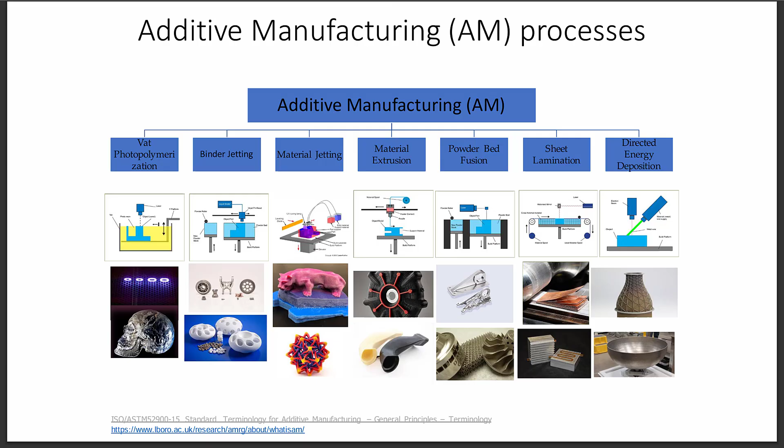So what it does is pull something out from a liquid reservoir. I don't want to spend too much time explaining it in English—the video can explain everything. The Form 1 Plus is a stereolithography 3D printer.

It's called vat photopolymerization—vat is basically a liquid reservoir. Let's start by taking a closer look at the printer. When we open up the light-blocking cover, we can see a build platform inside.

This metal plate is where the parts are made. Underneath the build platform is a resin tank. This clear window gives the ultraviolet laser a path to cure the resin. To start a print, we upload a file and fill the resin tank to the indicator line.

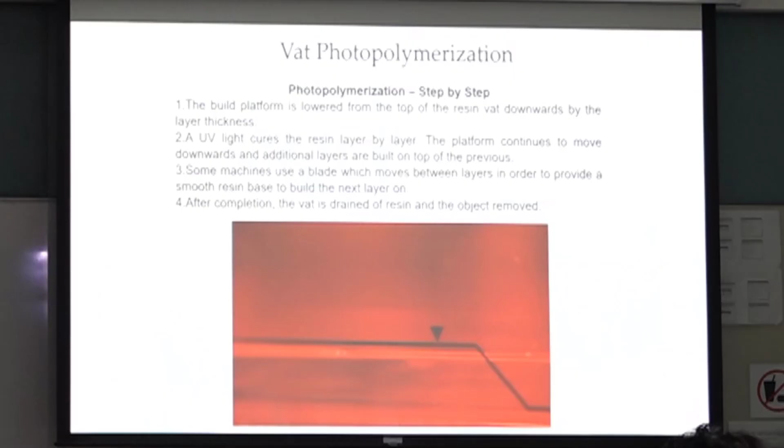You can see the laser passing back and forth inside, hardening the resin. Nowadays, this method is used less and less.

Instead of a laser passing back and forth, some printers use a projector. After printing, you wash off the excess resin to clean the piece, then snip off the supports and finish removing the part. Stereolithography is known for producing extreme detail, with layers down to 4 times finer than a human hair.

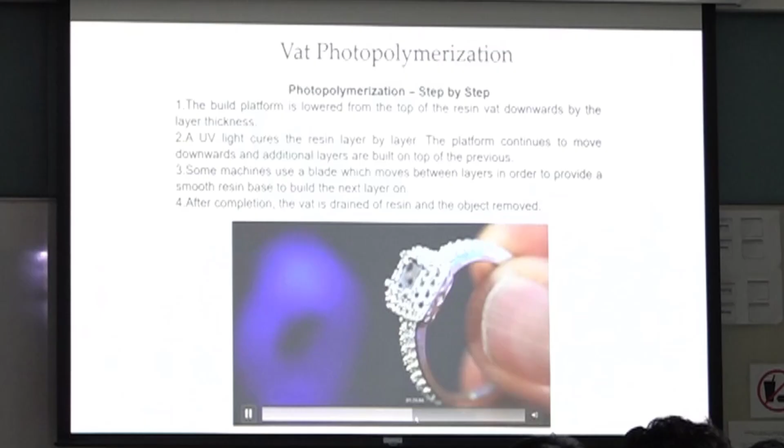The Form 1 Plus lets us take advantage of a library of materials, so we made some other parts to show what these resins can do. A castable resin gives jewelers and engineers an inexpensive way to produce metal parts. This flexible resin is great for simulating different textures, especially good for printing very soft material.

Now let's compare how the Form 1 Plus parts stand up against the filament printer. Yeah, so you can see this compared to your home use one. Feel the ridges. You can see that filament parts quickly snap along the layer lines.

Yeah. The SLA process creates a chemical bond, so our prints are quite strong and can sustain for a very long time, because this one is thermoset. Thermoset, not thermoplastic. So this can sustain temperature for a longer time.

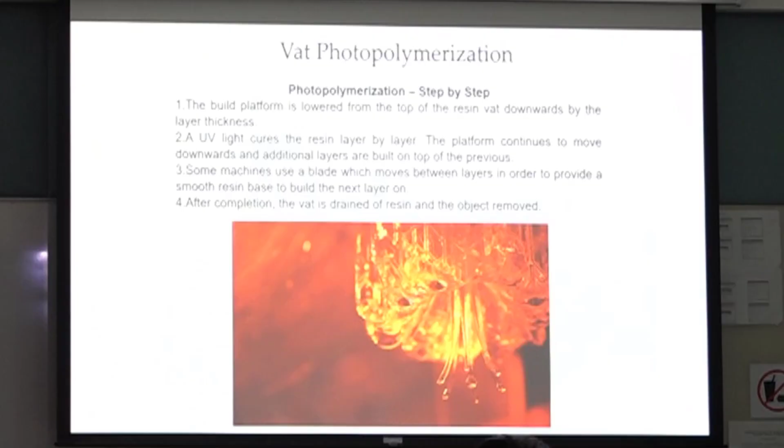So this one you have already seen. This is mostly thermoset. You have seen it in many of the applications like protective devices, like shoes. You have seen it, right? So the next one actually you haven't seen a lot, because this one is for industry use, so-called

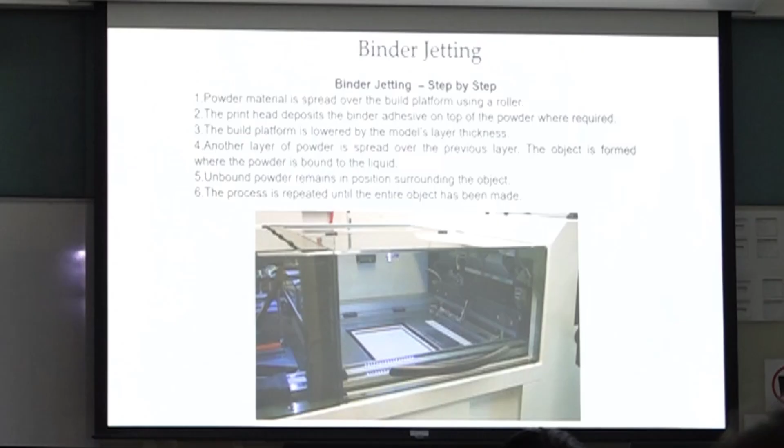binder jetting. Binder jetting additive manufacturing is a process inspired by the technology of inkjet printers. In this process, a liquid binder is selectively deposited on a powder bed with a printhead. It is a growing process that allows the production of parts for the manufacturing, medical, and dental industries. This technique enables the production of metallic and ceramic parts as well as sand molds for castings.

To start the process, a 3D drawing is imported into the printer software. The powder to be used is placed in a dispenser, which ensures a constant supply during printing. First, a powder layer of a specific thickness is spread. Thereafter, the printing head, moving on 2 axes, projects the binder where necessary.

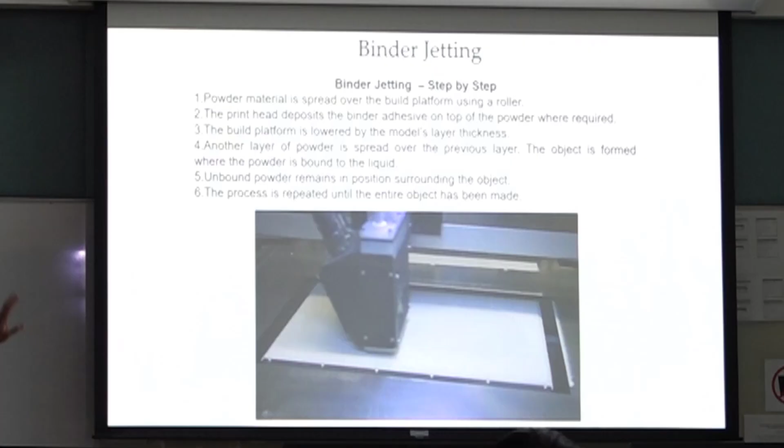Before moving on to the next layer, the solvent contained in the binder is evaporated by an incandescent lamp. The powder bed is then lowered and a new powder layer is deposited. Therefore, the production takes place in a series of steps that build the part layer by layer. When the cycle is completed, the binder is cured by placing the container in a furnace. The temperature and time depend on the type of binder employed during printing.

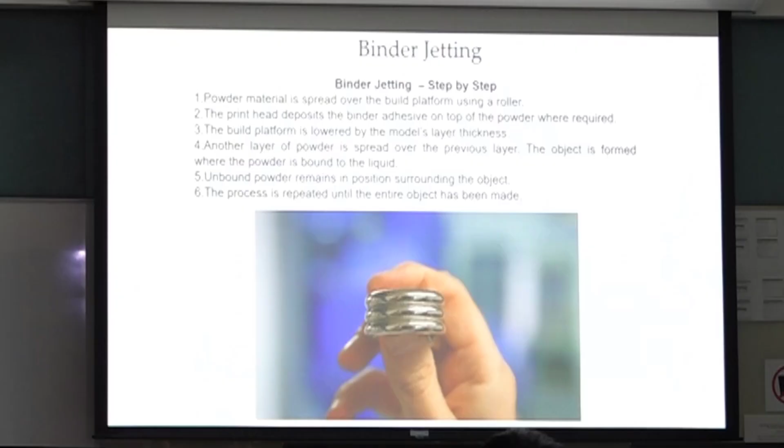After this step, unbound particles are removed to reveal the part or the mold. The sand molds are then ready to be used in foundries. The metal and ceramic parts must undergo sintering, infiltration, heat treatment, or hot isostatic pressing before being used.

Okay, this one, binder jetting, is actually good for mass production. One very popular application now is the iWatch. The casing, the outside shell, is actually binder jetted. This can be mass produced and the price is relatively low. Apart from the metal things you have seen, like titanium, it is actually very good at making ceramics, like some of the teeth structures.

And the third one, number 3, is called material jetting. Material jetting is exactly like the home printer. Inkjet machine, right? It's just in 3D. Maybe the best developed one is HP. They can print 2D, they can print 3D. And this one, you see the picture, it's very good in multicolor, a very vivid demonstration. And it can print very clear polymer.

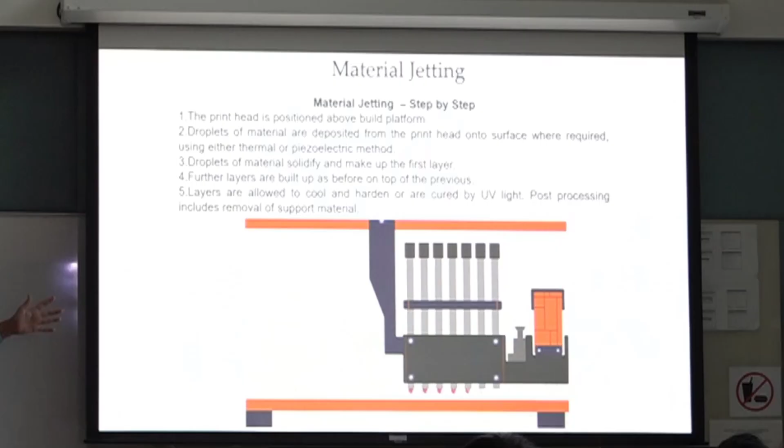PolyJet. Beautiful, precise models. A huge variety of materials and colors. Yeah, it's the same as the HP inkjet printer, same principle. But instead of ink, plastic. A UV light instantly cures the plastic, solidifying it. And so, layer by layer, complex models take shape.

The most advanced PolyJet systems can build multi-material parts. Soft, rigid, clear, and colorful. You can even adjust material properties like heat resistance and durability. The same technology that makes gorgeous prototypes also makes precise manufacturing tools.

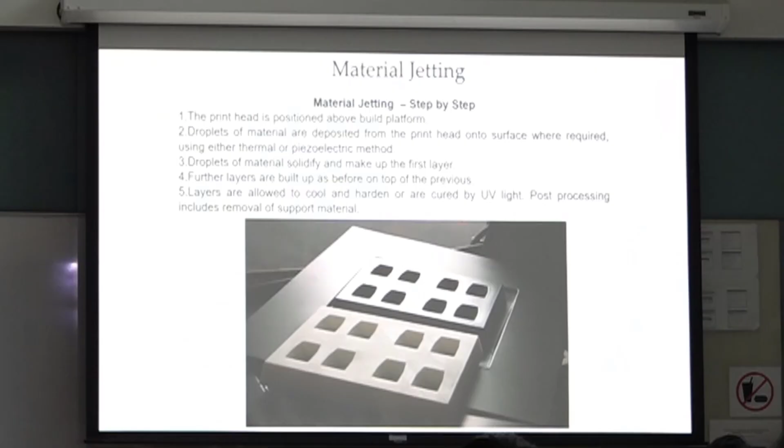Designers can predict future needs and serve them now. Manufacturers deliver better products faster and with less waste. Researchers have new methods of saving lives. PolyJet is reshaping industries like film, fashion, and medicine. It's helping people with great ideas improve the future. What's next?

Okay, right. So this one is a bit like an inkjet printer, because it can have many nozzles at a relatively low cost. Actually, it can mix very well, because it comes out as a liquid jet, small droplets. So it really can mix and make multicolor ones.

If you see in my lab, the QR code actually is printed this way, right? Some of you have already seen it. So it's very good, but they only do polymer, and they only do colorful things, right? I mean, good for demonstration.

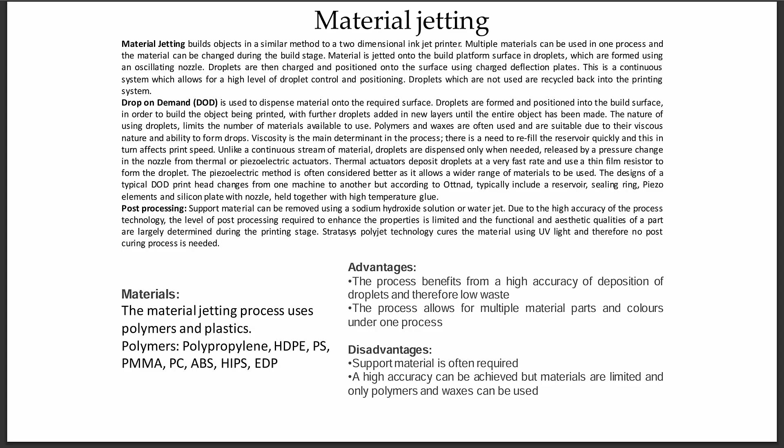This is number 3. Number 4 is the most common one, and most people think this is 3D printing, but actually it's 1 out of 7, okay? It is the one that we see every day, in every home. It's a game changer. It can create parts and geometries that you can't do in an injection mold. That's going to create a revolution in the near future, and this technology will be adopted as a major process for manufacturing components.

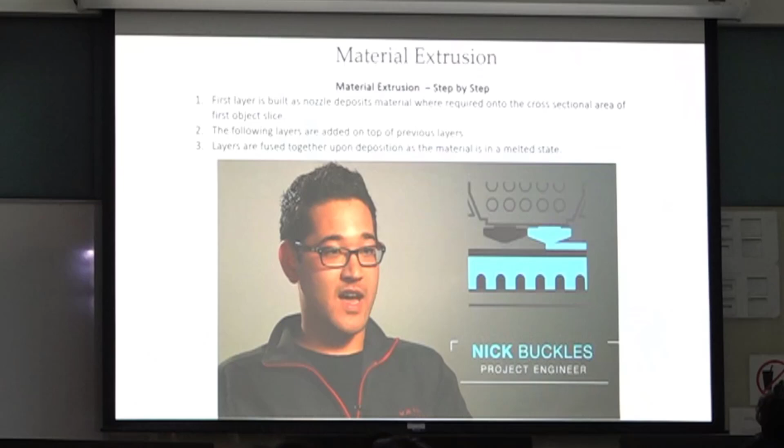FDM, yeah. This is what we think that was the 3D printing. It's a fancy word for laying down a small bead of plastic. What's really cool is you can have a real engineering grade thermoplastic, so the same stuff you'd injection mold. Someone needs an ABS or a polycarbonate or a high temperature Ultem.

Yeah, this is for industry use, ABS. What we are printing daily is the cheap PLA or PETG, close to the same quality and mechanical properties. You can see, normally the surface will not be nice. You need an additional polishing step, at least for a good looking part. If you want the industry use, that's more challenging.

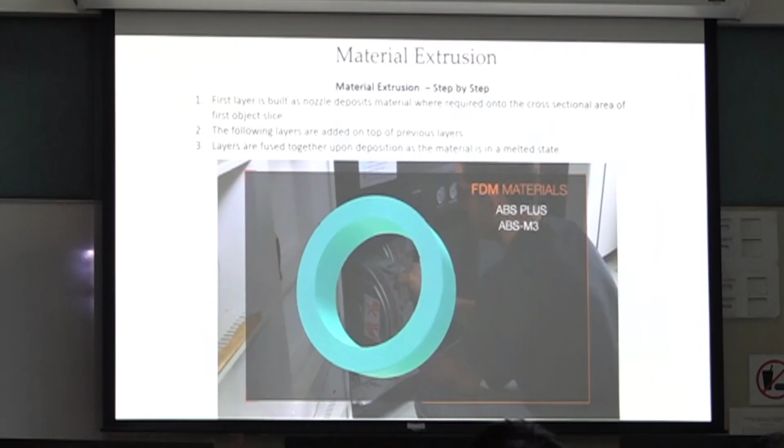The raw material is produced into filament, like a fishing line type form. That filament is wrapped around a spool. Yeah, this is the one that you see mostly used to build parts. I mean, it used to look like this.

About 10, 15 years ago, it was first refined and systematized by this US company. The material is extruded and then layer by layer the part is built. But now, of course, most of the companies, 9 out of 10, are from China.

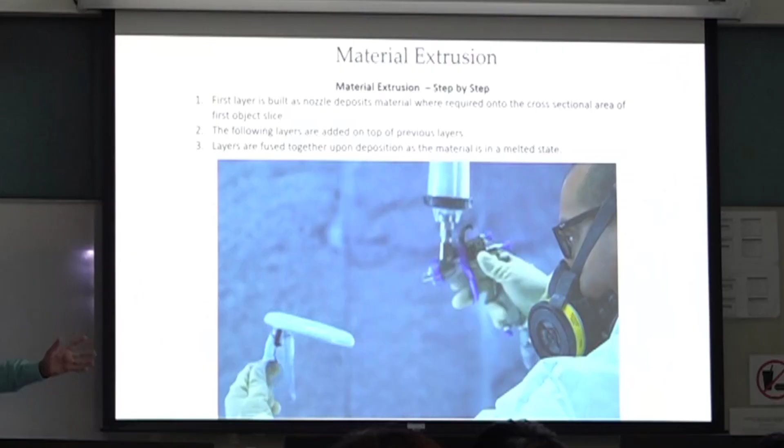Support material is removed. We also offer post-finishing operations that can smooth out those layers. Yeah, most of the printing will not look good. You still need extensive post-processing to provide smooth looking parts. We developed the technology to fit a full breadth of geometry sets.

But this one, I believe everybody knows it. Everybody has seen this machine. Everybody uses it. And the new generation is a bit like this. So they deposit the material bit by bit. Okay. So this one, as you can see, can only use thermoplastic, right? And some of our engineering use, but for our daily use, the cheapest one that we buy, I mean, for the souvenir I give you, is PLA or PETG, right? So that's the cheapest one.

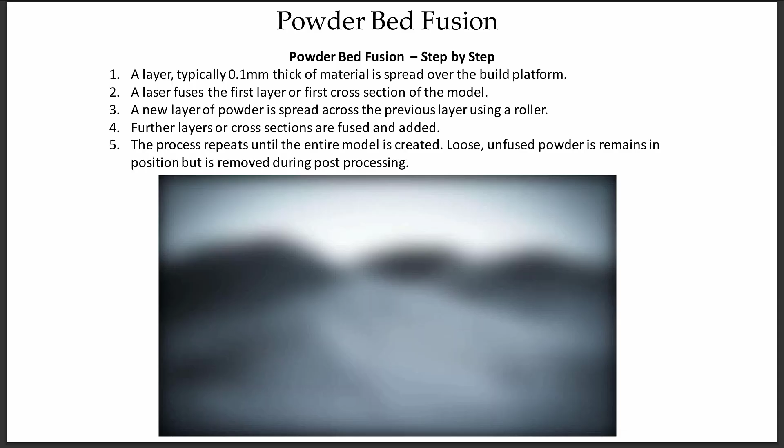But for most of the real high-end use, if the one I give you is $1, the thing that I can sell is $1,000 or $10,000 a piece, or even $1 million a piece. I mean, $1 million Hong Kong dollars a piece is actually this number 5, right? Powder bed fusion, mostly making metals, and obviously not used for our commercial use. It's for defense, for aerospace, and for rockets, right?

Like Elon Musk or this Dragon, those kind of rockets. Now, pretty much all the rocket components are 3D printed, not the old school, right? All 3D printed, and the process is like this. So you have seen it in my lab in the morning. So it's from metal powder. We'll fast forward, okay? Yeah, it's a bit like this.

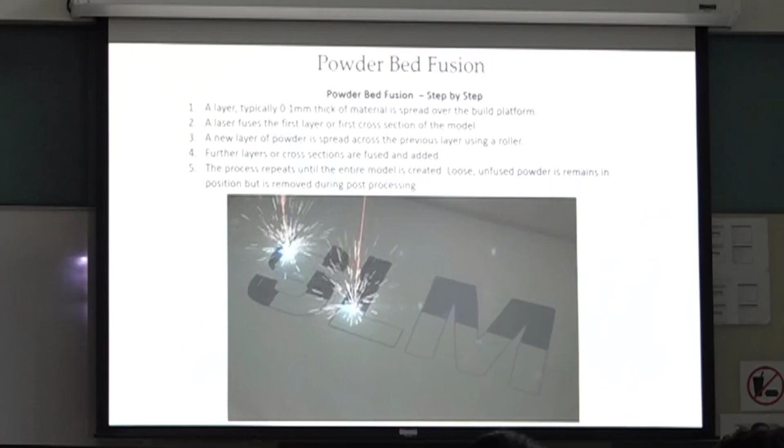You use a laser or energy beam to scan one layer, and then give an additional layer of powder, a new layer of powder you can see, and then you print again. You may write the same thing or you may write differently, but layer by layer. Because of the powder bed support, they can create very complex geometry. So if you want something very strong, very complex geometry, this is the one. And that's why most of the industry actually prefers this one.

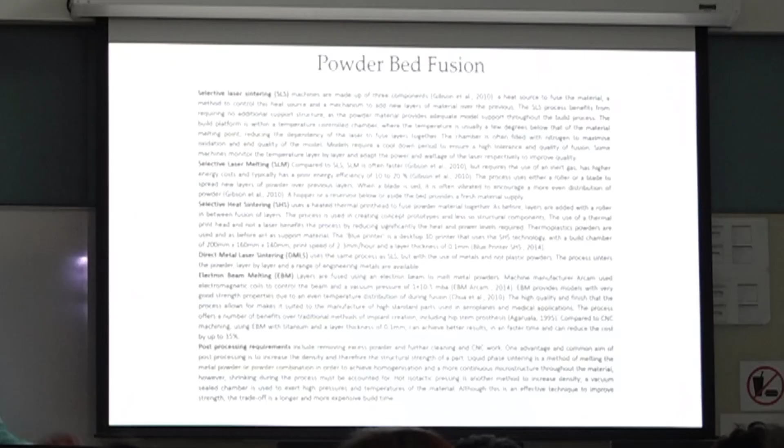They have many variations, but as you can see in my lab, most of the industry uses this. I would say 80% of metal parts are made in this technique, not the FDM that you've seen daily. There may be some other variations, like this one, E-beam, right? This is to print the aero engine, the fan blade, and also the nozzle. So there have been many uses already in aerospace, and it allows for the creation of optimized parts that are not constrained by the limits of traditional manufacturing.

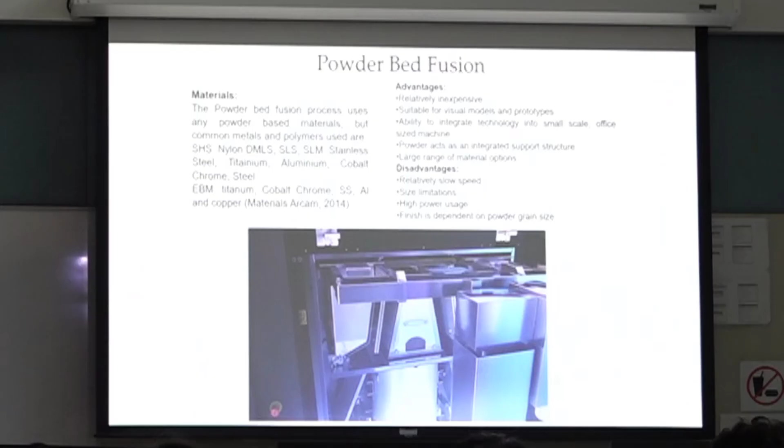Arcam EBM has the unique ability to tightly stack parts within the build in order to increase productivity. Instead of a laser as heat source, this one uses the electron beam. Following this, metal powder is loaded into the machine. The build chamber is then closed and a vacuum is created to ensure a clean, controlled environment that allows for the processing of reactive material.

Next, Arcam EBM's powder layering system evenly distributes a thin layer of powder on the build. Same principle, powder bed. The electron beam heats the powder bed to the optimum ambient temperature and then proceeds. Electron beam first heats the substrate, first contour melting, and then higher the energy and the melt.

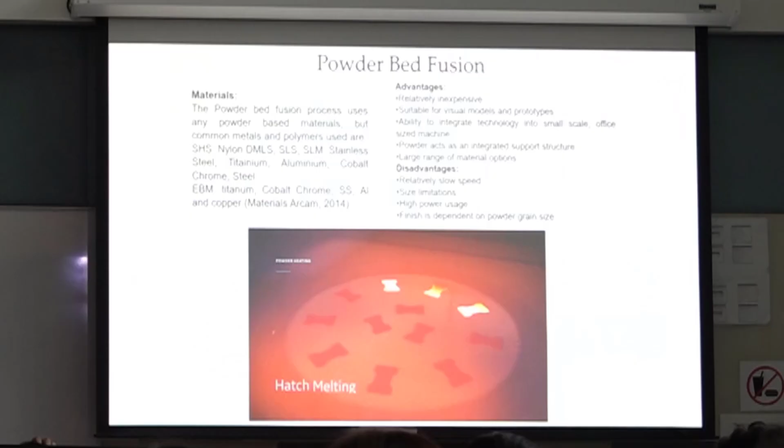Generating the beam contains no moving parts, allowing for extremely fast and accurate beam control. So you can see the electron beam, it's just all using magnetic force, electromagnetic field, to control the electrons and to move to the area that you want. As each layer is completed, the build is lowered and a fresh layer of powder is ready. Yeah, there is a new layer of powder. And one by one, then the build is complete, the whole thing is extracted, and the Arcam EBM machine is prepared for the next build.

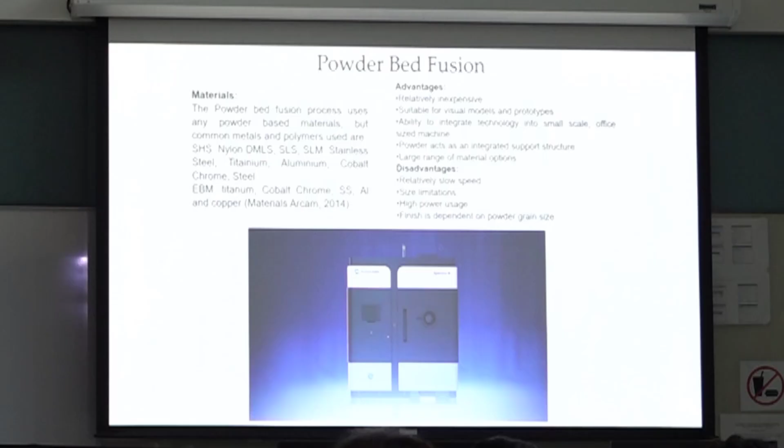Okay, so this one is also the same powder bed fusion, number 5, but using a different energy source. Most people use laser, right? Some tend to use electron. This is for high-end use, for very sensitive materials like intermetallics, titanium aluminide, TiAl. So this is not for iPhone, of course. This is really only for aerospace and defense use.

And in the world, there's only 2 suppliers. Obviously, one from China and one from the US, GE. And this one, I think most people haven't seen it. I only saw it once in my life, and this is a very funny one. Layers of newspaper, or paper, actually. This is really for fun only, and not in much use.

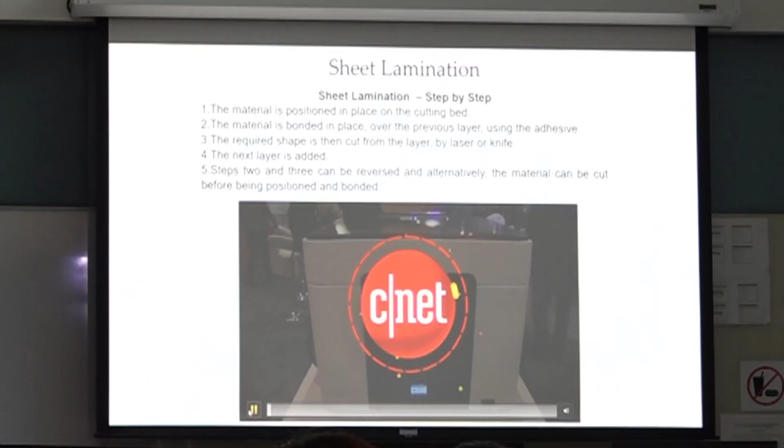Sheet lamination. It feels like a hammer, but how would you like if I told you this is actually made from paper and printed with a 3D printer? This is the Mcor ARKe, the world's first desktop full-color 3D printer, and it can print a variety of different objects that look almost like everyday life. They are very hefty, very sturdy, even though they are made out of paper. So there are actually a couple of different components to this 3D printer.

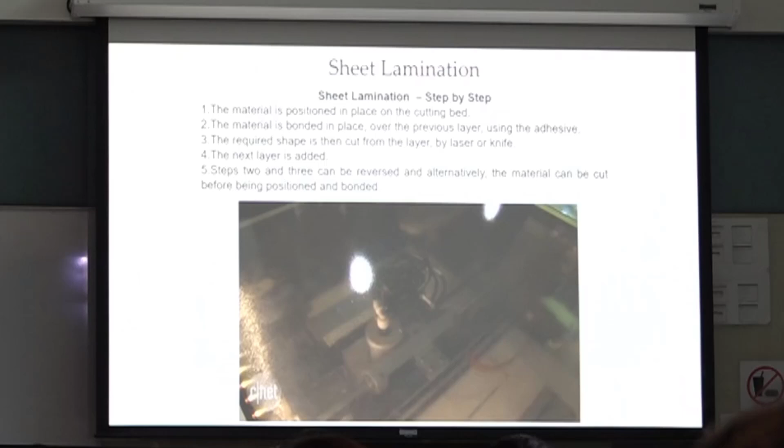But of course, inside is a 2D inkjet printer. But I haven't seen it in life, actually. It prints all the color onto the paper surface. It is then cut out in the particular shape that needs to be formed. An adhesive layer is applied, and then a heat plate comes down to press the layer of paper into the one below in order to start forming the shape.

The company claims it's 4 times faster than an industrial printer that they have, and you can recycle the waste, plus the printer is using water-based adhesives and inks. This also means that there are no toxic fumes or powders released. The ARKe prints at half an inch per hour, which is comparable to other printers like the MakerBot, but it's not the fastest 3D printer on the market.

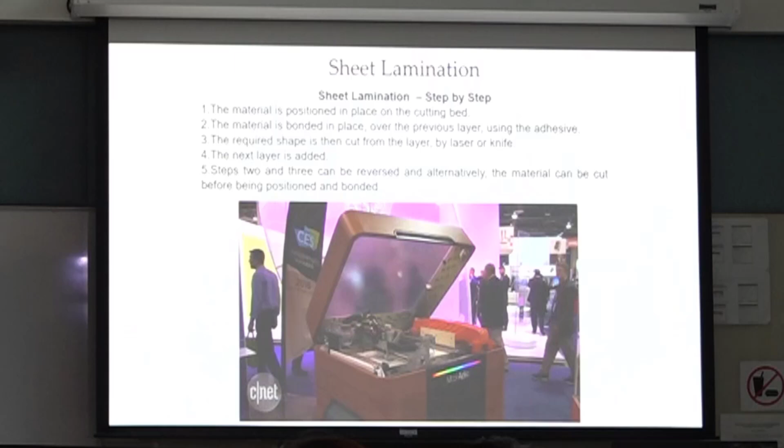You can get a couple of customizable skins for the printer, including wood, carbon fiber finish, and a brushed steel finish as well. The Mcor ARKe will be available for £5,995 or $8,995 US, available in Q2 of this year.

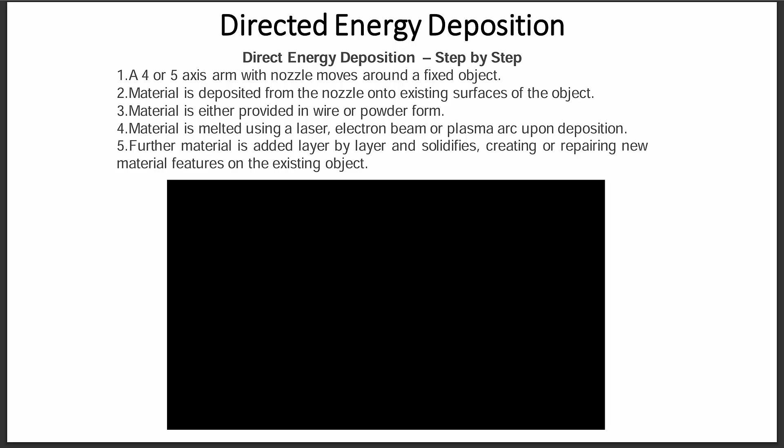Yeah, so you can see, if you sneak peek behind the background, that was almost 10 years ago and not much application really. Okay, but still it is classified as number 6, because its process is quite different from others. So the last one, quite often used, so-called DED, is number 7. Number 7 is actually quite often used in repair, in oil and gas, railway service, trains. You also saw it in my lab.

So it is very dramatic. It looks very busy, but actually cannot create a very complex shape. It looks like a very complex shape, but actually not. This is mostly used in repair or making something very large.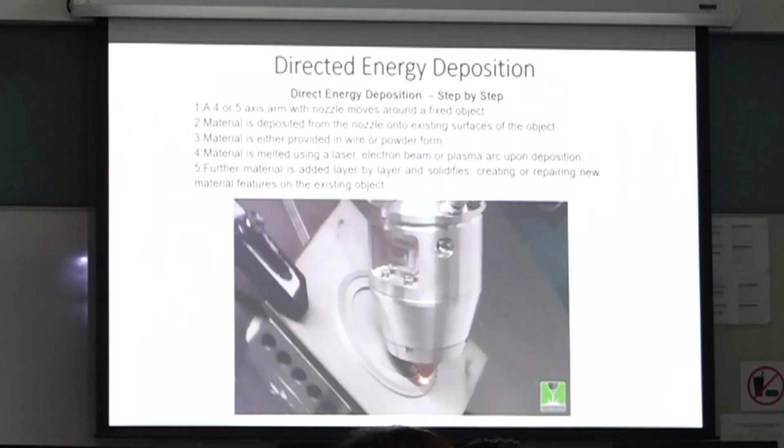Yeah, when they move, this is something like 5-axis. It looks something like this, right? But most likely it cannot have that. You always come down. That's why. And the most easy one is from below.

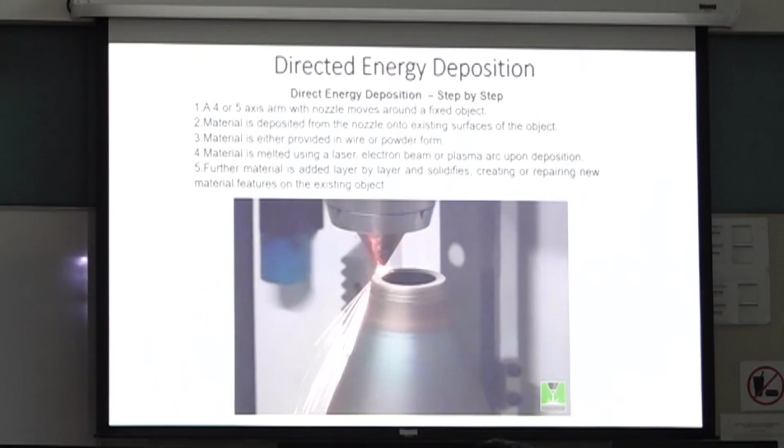They can put different materials. Okay, right, this is an example of what it makes. If you see, actually, this is them making the rocket nozzle, the nozzle where you spray the fuel. That's for the nozzle bit. And this technique is very good for making very large things and for making repairs.

So one of the examples you will see is the sculpture outside the government headquarters over there, right? That is made by this technique. All right. So with this, I would like to say that in 3D printing there are totally 7 techniques. It's not only number 4, FDM, that you have seen.

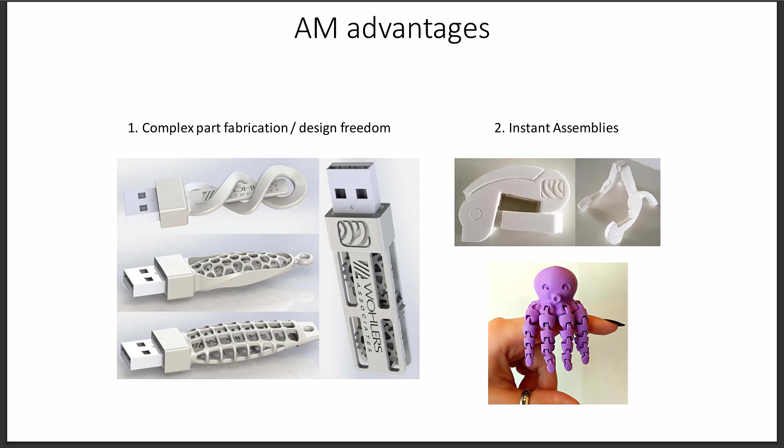So in industry use, obviously, it's not designed for toys, right? We are using it for real life use, and real life use has many advantages. Why do I need 3D printing? Why not use other things? A few advantages. This has already been summarized; it's already the golden rule. There's no argument. We know there are 6 in total, right?

So number 1 is design freedom. You can do some very artistic things. If you happen to have your so-called Shap-E, right, or Sora, I mean, Sora is video, but Shap-E, you want a 3D object that looks beautiful, you can do that. Or instant assembly is number 2, which I gave you this morning: one print, many parts together. No need to assemble them. They can move automatically, right?

One example is my little octopus, right? The other one is the shark. Actually, that shark was generated by AI, but just for your example. It looks good, it can move, and this model sold more than 1 million, just selling the design only, not the actual printed parts, right? But that's for design only, for art design.

For industry, things are different. Most people will tend to use so-called part consolidation. That means before it was 20 parts, now only one part. And this is one. If you fly, inside the aircraft engine they spray fuel, right? This is the nozzle.

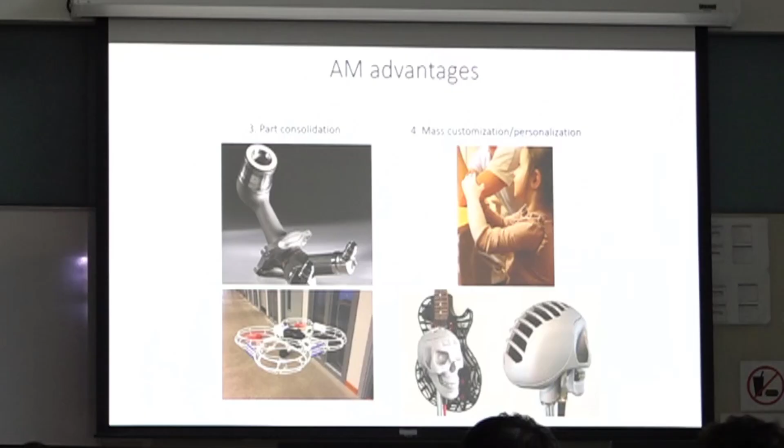The other one in our daily life is the drone. It used to be slowly assembling everything, and now one print, continuous print, job done. No need for assembly. But of course, this is a high-end drone, but even higher-end drones now use carbon fiber, lighter and stronger. If you see DJI, they're all carbon fiber. So this is not the lightest one, because they use a different material.

Another quite often used one is mass customization. That means 1 million parts, 1 million designs. Every part a different design, but you can still mass produce. One good example is your hand, another very common one is teeth, right? Now even better, the transparent teeth aligners, dental braces. Now all 3D printed, no exception.

That's quite costly, right? Invisalign easily costs you 20K, but the price can drop due to the maturity of the machines. The machine you see in my lab can print that dental one, very transparent, as if you never wear it. Everybody's teeth are different, everybody has a different design. But in Shenzhen, teeth are done in the thousands every day, so we need to make them in big numbers with all different designs: 1,000 prints, 1,000 designs.

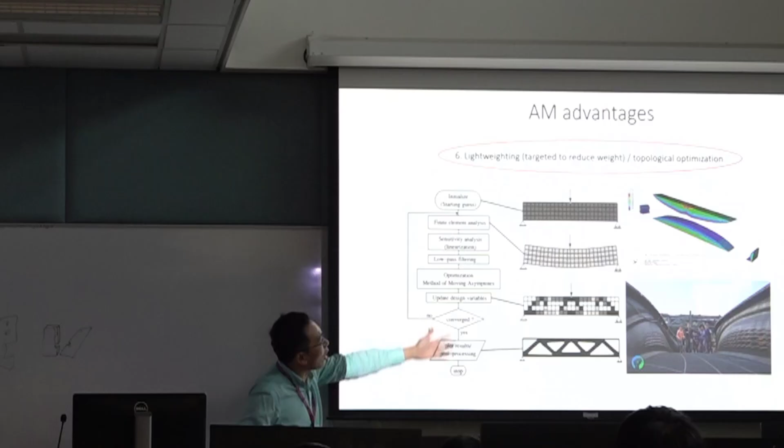If your boss asks you, hey, do we have any better design? No, this is the best, unless you ask something different, okay? 100% sure, because it's math. So the process of such design, the math, the algorithm, the flow chart is a bit like this, and the design process looks a bit like this.

And actually, it's different from AI, right? Generative AI is just a summary of existing things, a combination of two things. Please draw me a cat wearing sunglasses. Okay, they give you a funny picture, but nothing useful. It looks beautiful, but it's still a combination of cat and sunglasses. No new shape, right? But this one has no limitation. And of course, we have seen it in our daily life for many years already.

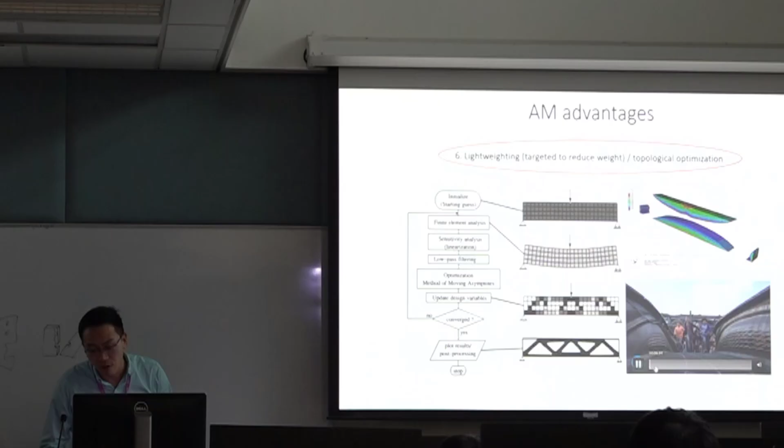If you happened to attend the lab tour this morning, you saw my components, like some of the heat sinks, already using this technique 10 years ago. But now we have 3D printing, we can make things much better. This is one example. They even made a bridge out of it. The printing process looks like this, the design process looks like this, and the end product looks like this, okay?

Of course I don't have the time, but it was put on the Amsterdam canal, right? For the design, you just tell me how much load comes from the top, where your supports are, how long your span is, and off you go. Give me your best design. And the answer is the best design itself. So how does that come about?

We have to go back to the old school of engineering design. We only talk about engineering design, we don't do art design, okay? In engineering design, we normally always follow these 4 steps. Take a simple example. First, unlike art design where you think freely, in most engineering design we do what the customer wants. For example, on top of this building, please give me a windmill.

And that windmill can power 1 kilowatt. 1 kilowatt is not big, right? But you can imagine we have space constraints, we have the amount of power we need to generate, and this is an engineering design problem. We have clear numbers, clear constraints, and later on, rough ideas. That's called embodiment design. For rough ideas we don't touch any software. We just use our hand, sketch, and decide which direction we should go.

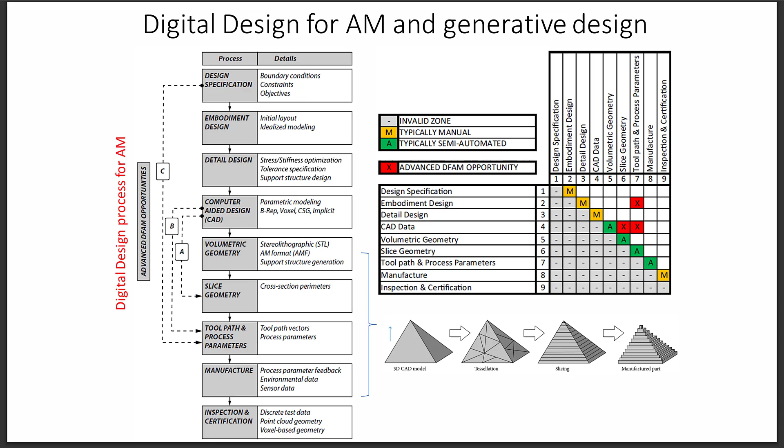This is the process, but translate that into our software language: design specification is where we have the professional term called objectives. That means what do you want to achieve? Constraints, what constraint do you have? That means I won't only have the objective, it's something like I want the lightest structure, or I want the strongest structure. Constraint is, oh, my space is only one by one meter. And the boundary condition is I need to sustain my load, right? I need to sit here and carry 100 kilogram of weight, that's a boundary condition. And given that, we have the initial design.

And this is okay, what we will talk about. So how do we do that? Our current coverage is only the beginning, okay? Later on we'll go into detail, say oh, the diameter is 4, the height is 1 meter, and something, blah blah blah, but come to detail, right? Later on, translate into something a computer can understand, that's computer-aided design, all the softwares.

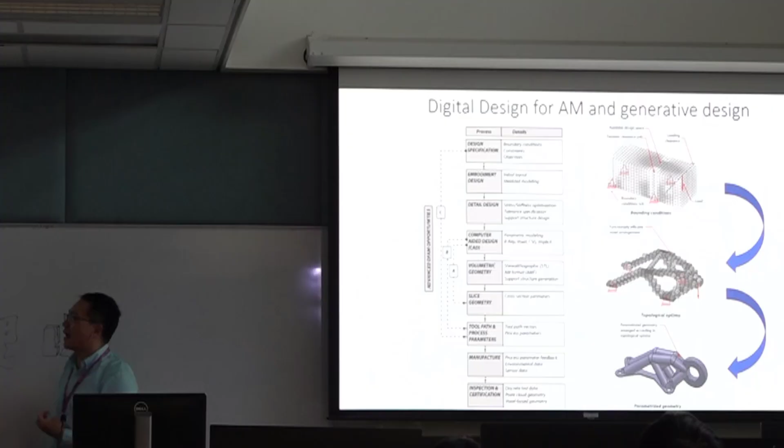So our process, in terms of automatic design, looks something like this. It's slightly different. We give a defined, fixed design space, that means you only design within this space, go outside, not possible. And I say, oh, I have my load here, I sit myself here, 100 kilogram, and I need to support the ground, and I have my space, and what's your objective? My boss say, okay, please reduce the weight by 50%. And I say okay, reduce the weight 50%, and I want the strongest structure, okay, strongest structure, 50% of weight, okay, off you go.

So why do we do this, and why does it matter with 3D printing? It's because the nature of 3D printing nowadays is by weight. It's similar to when you go to the wet market, it's by gram, really, by kilogram. 1 gram, $1. 2 gram, $2. 3 gram, $3. What's your design? I don't care, okay? Design simple, design complex, same price, as long as the weight is the same. So that's the nature of 3D printing.

And less weight means what? Means cheaper. 50% weight, 50% price. 50% weight, 50% printing time, I can print faster also. If you want something cheaper, faster, and better performance, you need better design. Actually, you can do that. And how to do that? This. That's why we reduce weight, because a lot of it is just not useful. So I make my algorithm.

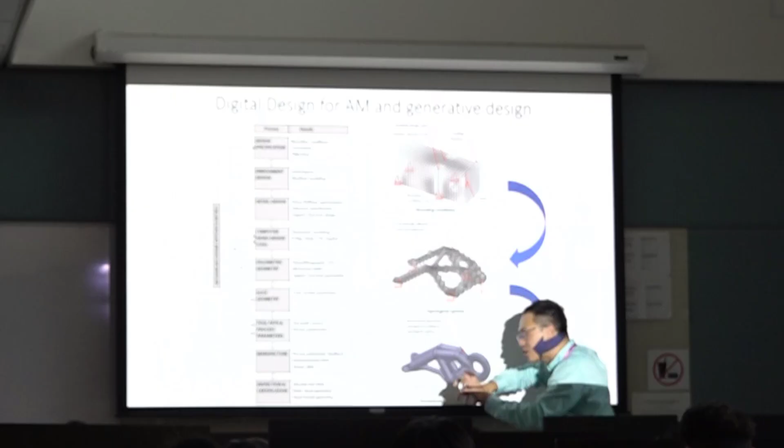This is my space. I cut my space into small cubes, right? Number of cubes, they call voxels, okay? And I ask each individual one, are you contributing? If that one says, oh, I'm not carrying a lot of stress, I'm not carrying weight, or I'm not carrying the strength, okay, I'll just remove that one. It's a very simple concept: only those useful behind, remove the not so useful one. Of course, everybody is useful, but some are more useful than others. We have to deal with that.

We remove all those less useful ones. We keep those small little blocks that are bearing a lot of stress, we keep them there, and remove 50%, the least useful one. And whatever's left behind, I acknowledge, and this is my design. And then in the end, okay, it comes out, it's like this. And of course, this is embodiment design, the concept design. From the concept, then we go into detail, do a bit of smoothing, parameterization, that means convert it into parameters, and in the end, we come up with a product.

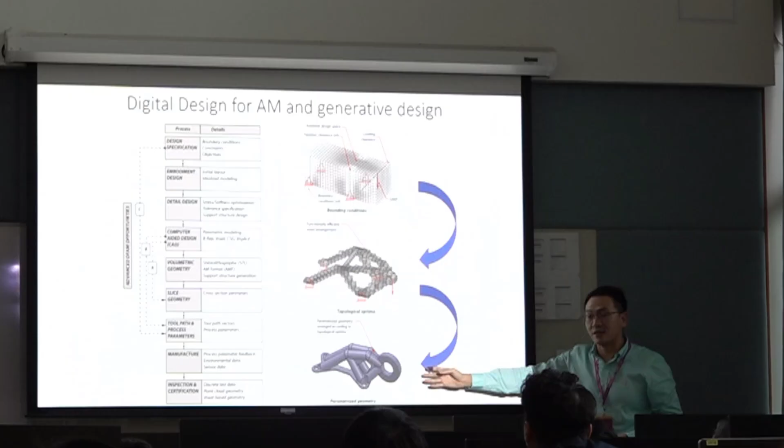And the good thing with 3D printing is I don't care about your design. No matter how complex I print, as long as you're light, you're cheap. So this is the concept, and this is why this thing becomes more useful, increasingly useful nowadays. So you can see it's clearly an optimization problem. We're not talking about statistics, about AI, no, we're doing a pure math question.

There is a classic optimization problem here. We have the so-called objective function. What do you want? What's our criteria for best design? You cannot just say best, right? You need to specify: strongest - what does it mean strongest? Stiffness, Young's modulus, or yield stress, or some detailed number.

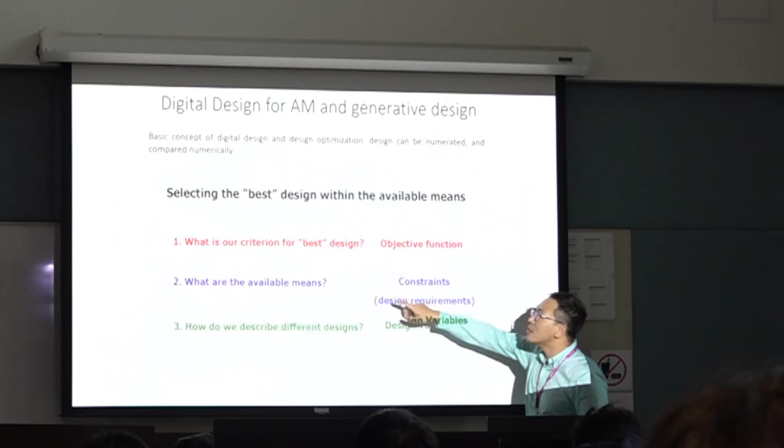And the constraints - what are the available means? Space is 1 by 1, or space is 2 by 2, what can you change? That's the design variable. What can I change? Maybe density, relative density - if I have material, relative density is 1, if I don't have material, relative density is 0. Exactly black and white. If I have all the black and white, I have my design, either in 2D or 3D.

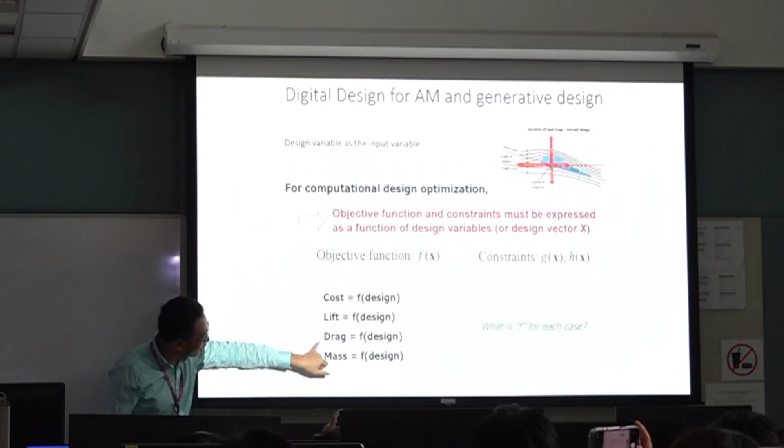So in the end, my design problem is still an optimization problem. I write it like this - this is my objective function, I have certain constraints, and whatever you want to achieve - your function. You want the cost, you want the lift, that means you want the drag, you want the mass, or if you want the money, that's also okay. This is just multi-objective optimization.

This is another simple math problem that optimization people can do, but write it in short: I want to minimize something subject to some constraints, be it inequality constraint or equality constraint - balance of force, right? And allow me to change something, normally material relative density - relative density 1, I have material, relative density 0, I don't have material.

And we just leave it to optimization, leave it to the math to give me the best design. Of course it takes some time - it goes through iteration, if it's not the best, I go back. But everything can be done iteratively by computer, you no longer need human intervention.

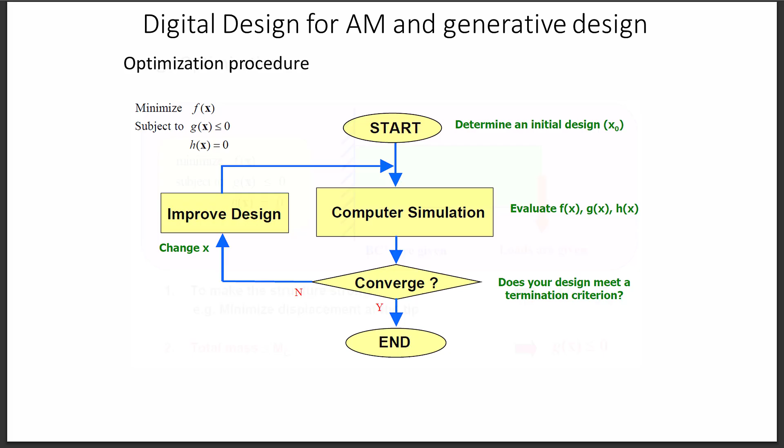So as an example, we do design, we don't talk empty math - we visualize it, we make it into pictures. So this is my home balcony. In Hong Kong, relatively rich people can have a balcony, so I go by the balcony, I'm doing smoking there - of course, most condos don't allow that.

I do smoking, and suddenly my boss says, hey, too expensive, 50% cost cut. Okay, fine, let me think how I do that. 50% cost cut - if I use 3D printing, that means I need to reduce the weight by 50%. But with 50% of the weight, to make my structure strongest, I need to minimize the displacement at the tip - it needs to go down as little as possible. So that means the structure is strongest possible, or stiffest possible. Okay, weight 50% reduced.

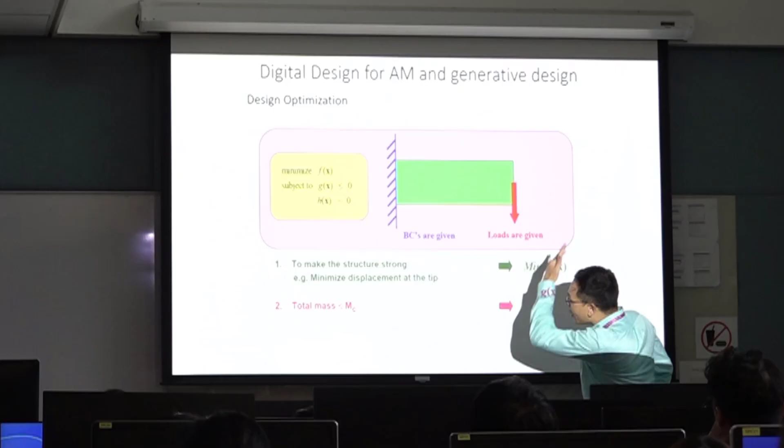Let's go. So how can I do this kind of design? Let it give me the design - there are 3 ways actually. This is not a joke, but this is true - 3 ways of doing design optimization. And number 1 is size.

That means diameter - I only change big, small, but never change shape. The second one, obviously, I change shape - maybe the total volume doesn't change, or the circumferential length doesn't change. It's like playing with Play-Doh - I stretch, I squeeze, the overall shape changes, maybe the area changes a little bit, but the length doesn't change, that kind of thing.

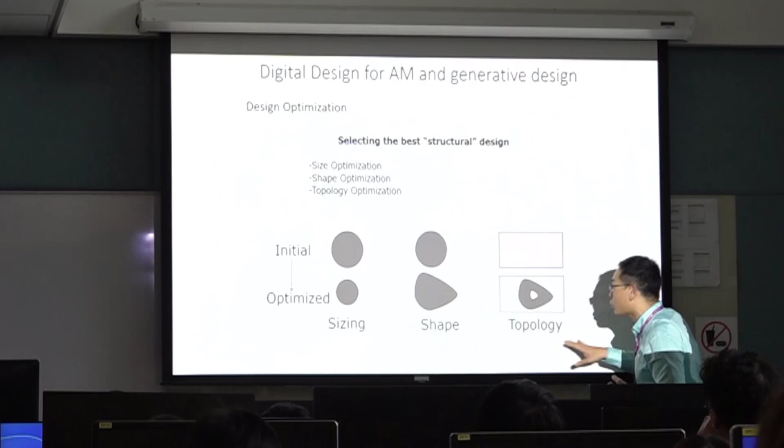The last one is what we use - so-called topological optimization, or topology optimization. At the beginning, I don't know what it looks like. I start to remove the not-so-useful parts, whatever is left behind, I accept it - this is the best solution. So 3 different approaches.

Normally for a simple balcony, you already know a simple balcony can use any of the 3 methods. So number 1 is fine - thinking about my finite element idea, or thinking about my calculus idea. This is a whole piece, I cut it into 5, I change the diameter of each individual one of them.

So, 5 - number of design variables is 5. I just changed 5 diameters, and in the end I got the best shape. It looked like this. But close - if you see, for this kind of design, you already know the best answer is this kind of triangle shape. You can use your mind to imagine that already. Close, but not exactly.

So you see, if you have a load coming here, the best design definitely looks like this.

It's just how much is the diameter that you want to lay, right? So that one not so. But if about the shape, right? How do I change the shape?

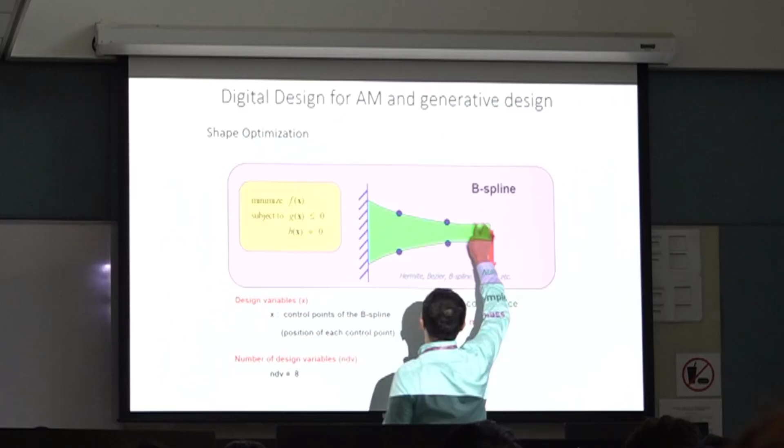Normally people do this, right? I describe the outer curve using some function, people call it the B-spline function. With this function, I have a number of control points. The moment I move my point, my shape changes together with my control points. So if I have 4 control points, I have x and y, x and y, x and y, x and y, so total 8 design variables, right?

So with this, I move, and obviously I change my shape, and in the end, through math, I can get the best answer, right?

So this in real life already has many uses, like the hook on the wall, hooking clothes. You can see you need to add an I-beam here, and the arm, both sides need to be thick, in the middle thinner. So this already has some real life use already, right?

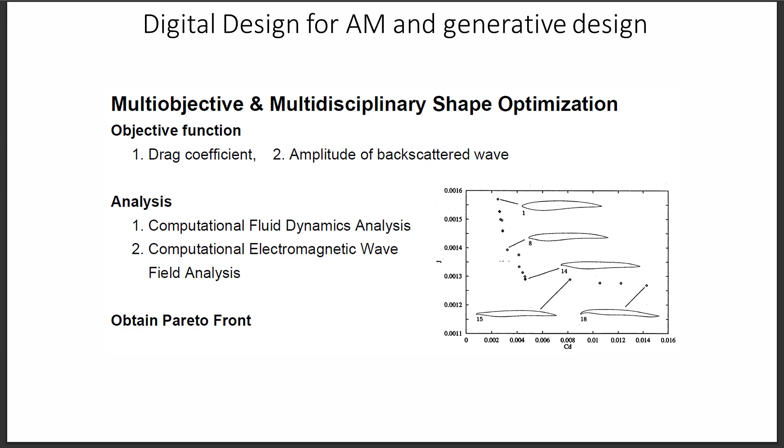And you can do your multi-functional or multi-objective optimization. But for our one, as you can imagine, our approach looks something like this.

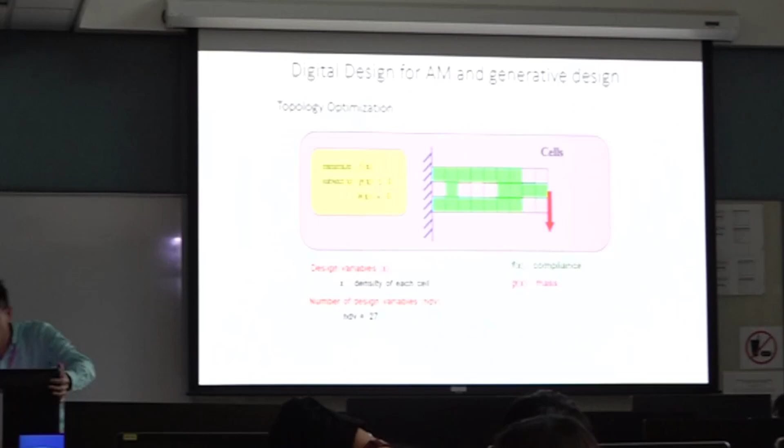So as long as your pixel is fine enough, like on our screen, right? Our screen is, I don't know, maybe 4K, dimension is 4,000. But normally say it's 1024 by 768, that kind of resolution, very low resolution screen. So 1 million, we can do 1 million, then everything should be naturally displayed.

So look something like this. The design process looks something like this, right? So this is my balcony. This is me standing there thinking how to reduce 50%. And in the end, I end up with a design that looks like this.

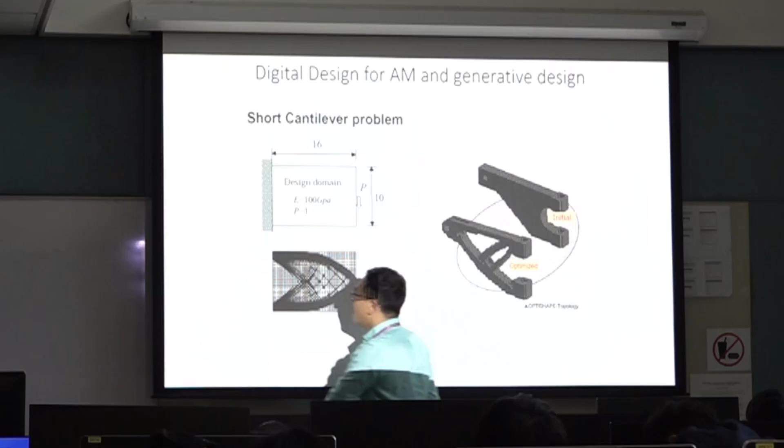So 1, 0 problem, right? Okay, I accept that, and then initial and end. But of course, this is not real life use, but more real life procedure looks something like this.

So you can see, in the end, it's still an optimization problem, right? No matter how, right at the beginning we have a response curve, and we need to find the minimum solution, the minimum of it.

We may need to use different optimization algorithms. From any random start, then we find the zero, the zero gradient. This is a gradient-based method. You can see we take tangentials, and when the tangential goes to zero, zero.

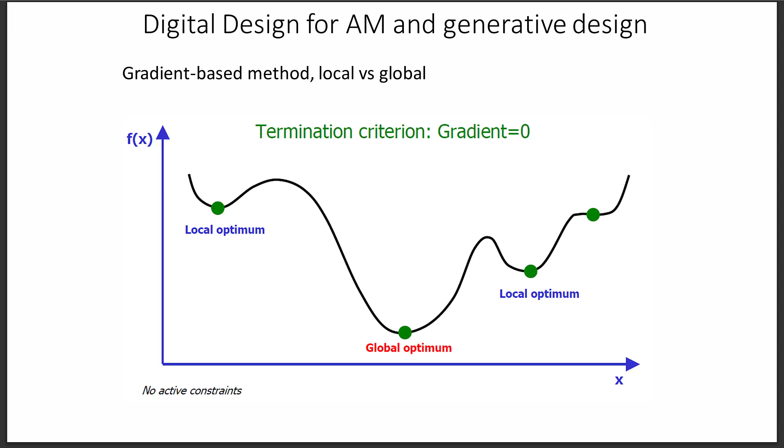Very good, right? But of course, life will not be that simple. If you have this, because at the beginning you don't know where you're starting from. You may start here, maybe you find a local minimum, you stop here, instead of finding the global optimum.

So optimization indeed is not an easy game, and very useful for our application. So in our university we have a number of professors focusing on optimization.

Be it gradient based, as you can see, and many others, even heuristic based, that means thinking based, AI based. Okay, this bit we use a bit of AI, but still for, how do I say, optimization.

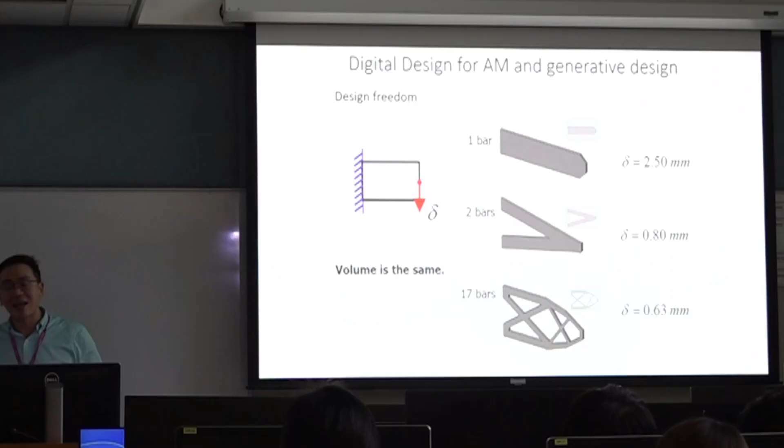So to answer the question, apart from Gen AI, how do we do generative design? We do optimization. So what are the differences? It's because that one is only design art, how useful it is, I'm not sure. But for our one, I can safely and clearly tell my boss, this is the best design.

Okay, this is the best design, unless you want a different thing. Of course, you may want a different thing. The boundary condition changes, the objective changes, the design can be completely different.

Okay, so what is the answer to my question? Now I show. Okay, my balcony. If I say traditional, I cut the top and bottom, okay, I leave one bar. The deflection, that means how much here goes down.

This is 2.5 mm. Simple two-bar design, right? Remember, this is what people think of first. If you're a physics teacher, definitely the first thing you can imagine is this one. Immediately, right? Same amount of material, same printing time, same cost. They're just a different design, and immediately it's 0.8 mm.

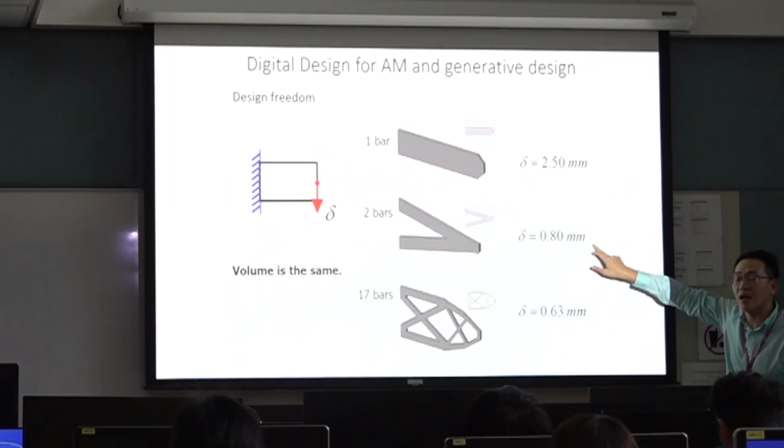But of course, if you really bother with topological optimization and use that, in the end, with this kind of design, we can further improve it. Right? Same material, same printing time, same cost, even less distortion. Possible. Yeah? So, just to show, okay?

Right, but of course things will start to get more and more complex, and you are thinking about the cost. Using traditional techniques, of course, this one will be more expensive. But remember, for 3D printing, same volume, same cost. This is the game changer, right? With 3D printing, the cost will be all the same as long as you use the same amount of material, and the printing time will also be the same. So that is the game changer.

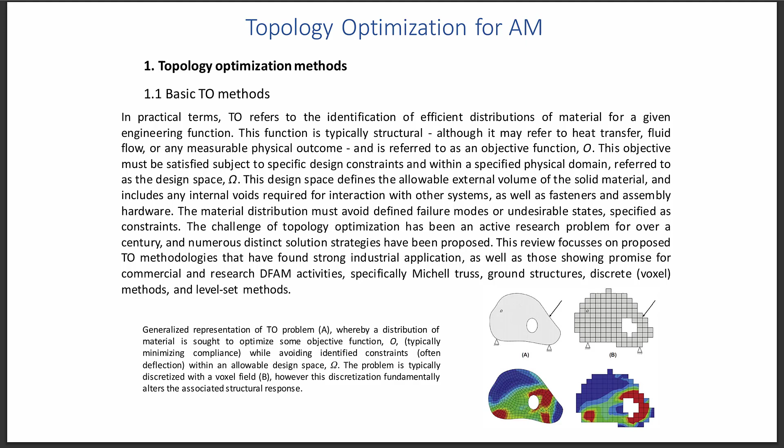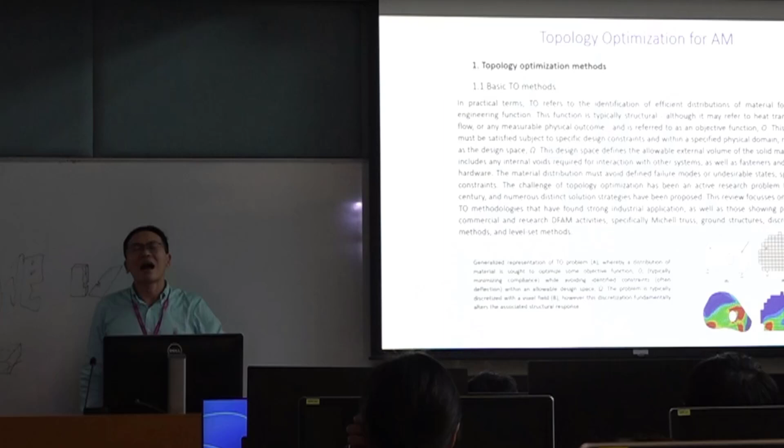Lightweighting, right? So how to achieve that? It's lightweight with the same performance, so you can save fuel. It's even more important for EVs because EVs have limited batteries, so you cannot drive very far. Only if the car becomes lighter can you drive further, rather than keep improving your battery. So it actually derived from this same request from the original car companies.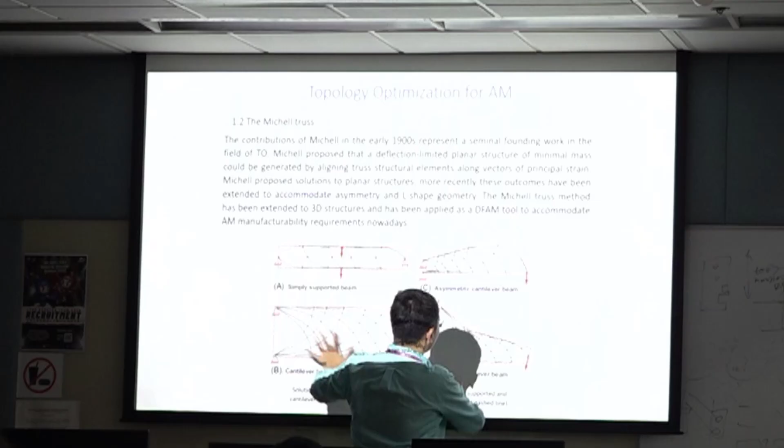But obviously, we have many different techniques. Including 100 years ago, an Australian engineer, Michell, had the concept of how to design a structure: I don't need to put material everywhere. I only put material where there is so-called principal stress. Not only stress, principal stress. That means no shear, if you do more analysis. So I only put material where there is principal stress, then I have my design. The concept works quite well, even until now.

So if that is so, I only need to design something that looks like this. A bridge looks like this, rather than a whole block of concrete. But later on, maybe 50 or 60 years ago, the ground structure method came. I have all the fixed positions, and I connect all the possibilities. I connect everybody: 1 to 2, 1 to 3, 1 to 4, 1 to 5, 2 to 4, 2 to 5, 2 to 6. After connecting all, I don't move my ground structure. Obviously, from the name you know it's from civil engineering.

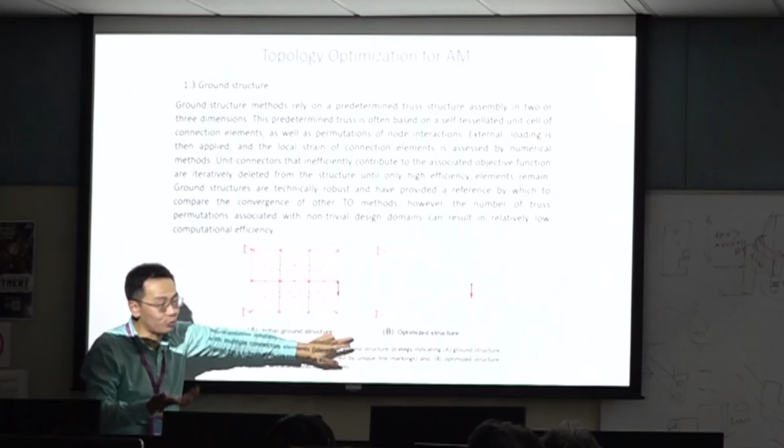And I remove the connections that are not bearing stress or not so useful. Whatever is left behind should be the most useful one. So in the end, it comes out like this, from here to here. A good design, the best design. It works. And at that time, computers started to come in, and people started to use them. So we actually do that.

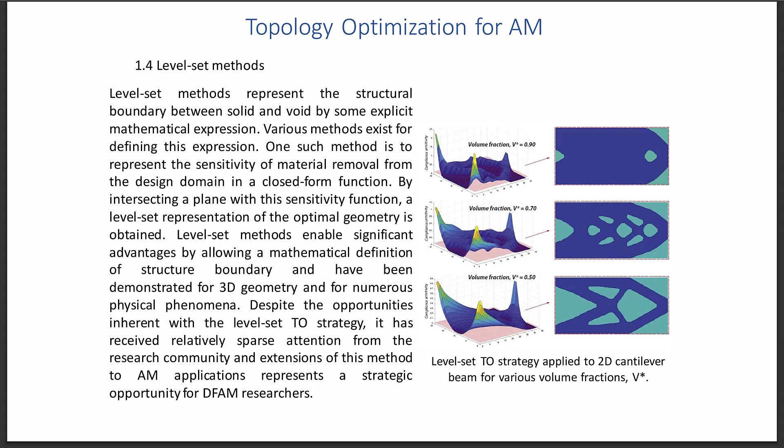But this is one method that we propose. And of course there is the so-called voxel one, a 3D pixel called a voxel, and we ask in each individual one, 1 or 0. But immediately you can see, if it's 100 by 100 by 100, that's already 1 million. Your computer almost dies. 10 million, your computer definitely dies. You need to buy new RAM, I mean, new memory.

So you can see it's not that high resolution. Need a lot of computer resources, right? So no. Then later on, another guy from RMIT, who later moved back to China, invented this method called BESO, bi-directional. That means I start somewhere, I can grow, I can shrink, but I cannot generate something out of nowhere, right? It's a bit like the growing and shrinking one. And it also generates some shapes that look like this, okay?

And the last one, by a Danish professor, right? Denmark, DTU. All these guys I mentioned are still alive. They're all alive and still teaching in their 60s, right? Danish professor, and this is one of the most commonly used ones, called the SIMP method.

Okay, that means I ask each individual pixel 1 or 0, or why it's called with penalty. Penalty means if it's not 1 or 0, I give you a penalty, force you to go either to 1 or to 0. So you will give me black and white. You know this world, most things are different shades of gray, right? There's no very black and white thing. It's also true in design. But we give a penalty so that it converts to 1 and 0, so that it gives me a very clear answer at least. Okay? 0 and 1 answer, black and white.

Right? Black and white. So the algorithm, I know the math is terrible, we will not introduce that, but they need a lot of math. Obviously, this is my penalty curve. You can see with black and white, white is 0, black is 1. 0 means no material, here is true material, and with this, your performance not going in a straight line is actually penalized. So depending on your penalty, this can be a 0 and 1 step curve, right? But we get close to that to ensure continuity, that means we get a smooth curve rather than a very sharp 0 and 1 curve, right?

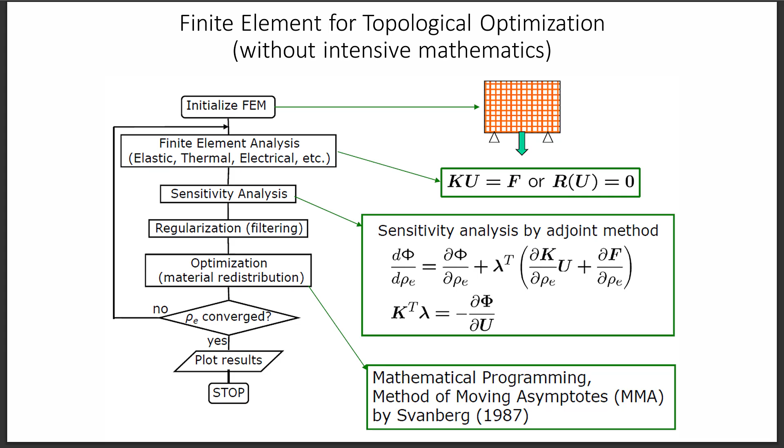Not good for optimization. So writing that into a piece of algorithm looks something like this. I know it's a bit complex, no need to introduce it, and translating the algorithm into a picture looks something like this. So what we do is, in the whole design process you just tell me how much load or how much constraint on this side, boundary condition, and what you want, 50% of weight or something like that. And then you try. Of course, the first try will not work, just analyze this. But after iterations of trying, I keep trying, keep updating, and in the end we will get the best answer, right?

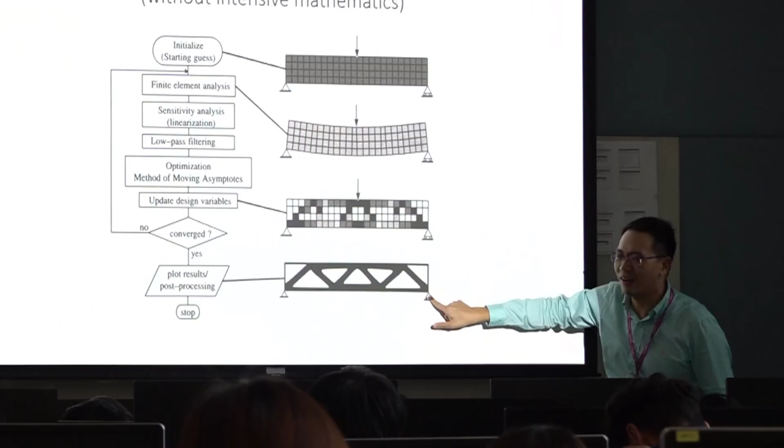This already looks a bit like a bridge, right? This is loading and supporting both ends. This looks like a 100-year-old bridge, that kind of thing. Yeah, we are able to design something. We're not talking about the past. You definitely see some of this in your life. This, right? If you are cycling, it's elastic. Or this one is the back panel where the air stewardess sits. Actually, the frame looks like this. Optimized, lightweighted, reduced weight, right? And this is on the A320.

And all other things. So before I end this session, you will say, okay, fine, very great. How does it look in real life? There are many uses in real life, but just to show you one video. This video is from Autodesk, okay? A 3 minute video will explain almost everything, actually. The process looks like this, right?

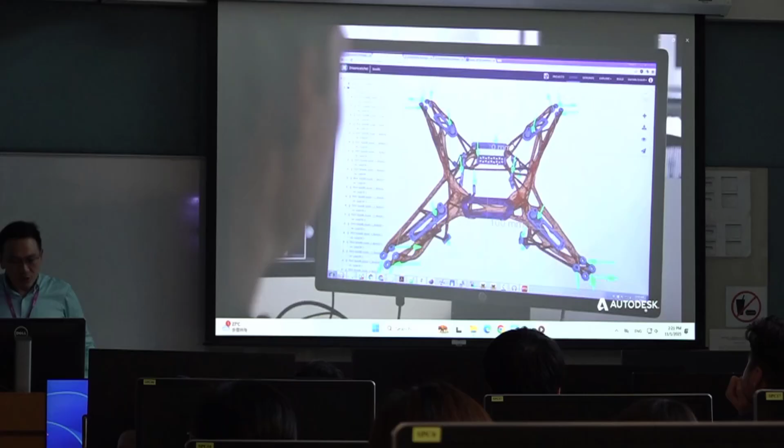Generative design lets you design things that weren't possible to design before. The convergence of cloud computing, new materials, advanced manufacturing, and these new generative design tools are open. So if I design a drone, the process looks more like this. You speak in the language of goals and then off you go. You frame the problem in terms of your objective and your constraints, and the computer generates objects. As a designer you're like, I would have never gone in that direction. This is opening up my space of possibilities. The HackRod project, we took an off-the-shelf race chassis and put 56 sensors on the tension points of the chassis. The HackRod team drove that thing out in the desert under extreme conditions.

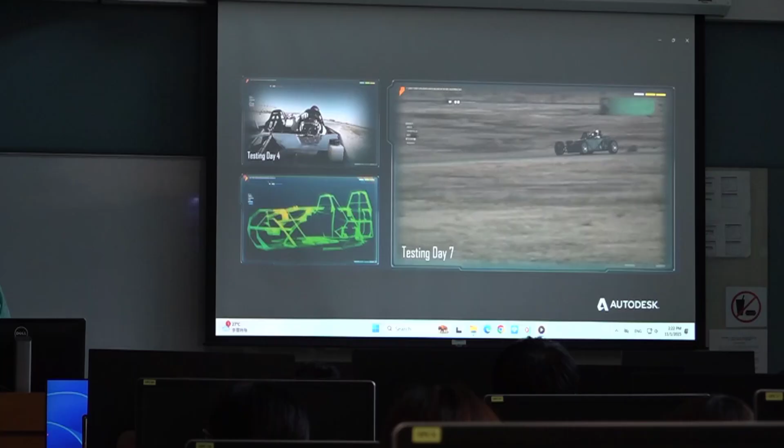From there, that data was analyzed and input into one of our generative design systems, Dreamcatcher, and a new chassis was grown. So this is one of the first times. This is just Autodesk, okay? Actually, just to show that every engineering software has this. It's just people haven't realized this partnership in the software. As these things become easier, there are going to be more entrants in every market.

Yeah, this is an example of the partition wall of A320. Car manufacturers, it means that they've really got to be looking at how they can start to adopt this stuff today. The human brain can hold 5 or 6 variables at a time. The computer doesn't have that limit. So with generative design, what you're trying to do is put all these conflicting...

Yeah, this is the one I mentioned, the ground structure method, right? And then they do a Pareto front, right? Optimization, classic. Then you do the trade-off, what we're considering, people can choose manufacturing, right? CNC. This is another example. At the time, no 3D printing, right? Still a CNC cut out. But just the classic question.

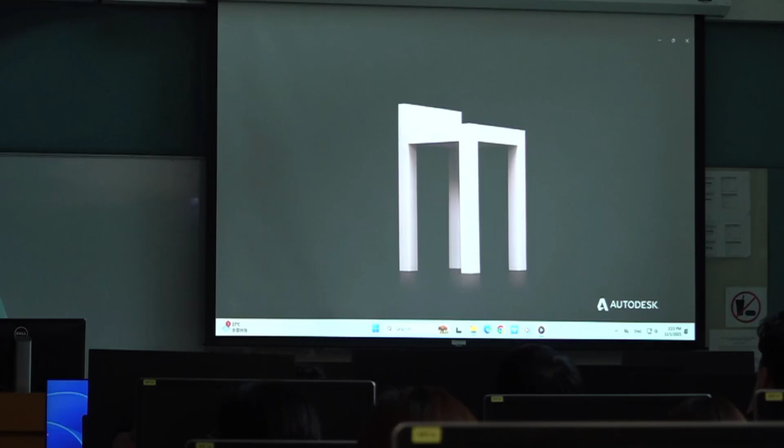I want to see these people, how heavy, and where's the support, and give me your light structure, and then off you go. Yeah, this is what I input. Letting the computer decide and give you hundreds of different options. Preference, including materials. You give me your design. And then the software will start to generate many, actually. Yeah, so this is the new automatic design procedure that I'm talking about.

Appreciate this. That was 2 years ago. 15 years in the NBA. That was a bad boy. Yes, he was. Oh my God. Separated my shoulder one time. Is that filled with diamonds or something?

You can see the lightweight design compared to... So is it heavier than a regular basketball? I think he gave it to the judges to show that it was the same size, same weight.

This is father and son, Kenyon Martin Senior and Kenyon Martin Junior. So his father passed the ball to his son, and then his son supposedly slammed it down inside the basket. Okay, no. Oh, fast forward. He fell 2 times. Okay. There you go. That's it. I pay homage to my dad. Right? Okay, yeah. So this is the story behind the making of it, right?

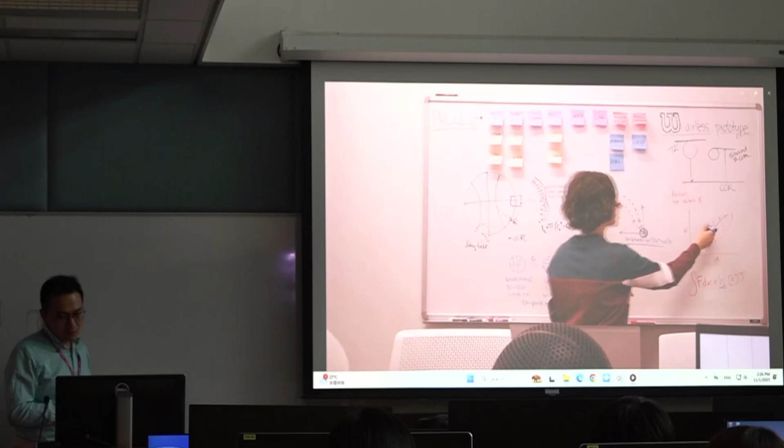The engineers started working together with industrial design. So bringing those two together, we were able to come up with several designs that we then later iterated on that resembled a basketball, felt like a basketball, but also performed like a basketball. And the most important part of the formula is the player, right? Because if the player doesn't love it, then it's not going to be a product or a prototype. We met with General Lattice. We made our design with them, and it was translated to a digital file that can be read very easily by the printer. We sent that file to EOS.

Working with a brand like Wilson is a little bit different for EOS because we are traditionally working with aerospace companies, automotive companies. Yeah, it's mostly for automotive, aerospace. Manufacturing was the right choice for the airless prototype because first off, it's literally the only technology on Earth that could bring this concept to life. Yeah, as I mentioned, there's a powder bed, swept across, and then a laser etches a pattern in 2 dimensions. And as this process iterates over and over, you end up with a 3-dimensional ball.

Removing the powder without damaging the ball. It's kind of like an archaeological dig. In my lab, right? It's like this. Sealed using a smoothing technique, and then dye is penetrated and reacted with the polymeric surface. You need to polish a little bit.

After that process was complete, we would send the ball to our NBA test facility in Ada, Ohio, where they would put the ball through rigorous testing. This is only a dot on the development path, but we're really excited about the first step that we have here.

That's our job, to push boundaries, change perceptions of the brand. But this is what we call the one. Basically, let's make one and let people enjoy it. So with this one, no need to pump air anymore. And it's very self-cleaning. If you feel it's not clean, you just wash it with water, job done, and you just play it again. Such an incredible process, such a life-changing process for me.

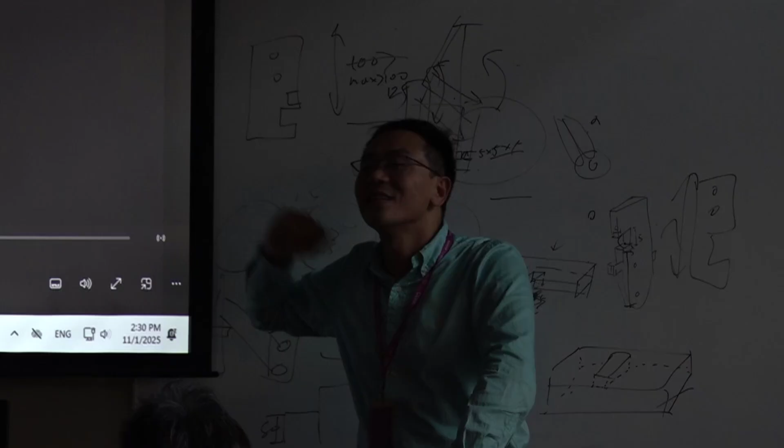That's why I mentioned if you use so-called generative AI with a prompt, it will give you a best guess based on past experience, based on what it learned. You see what I mean? In that sense, it will not generate a new thing. You want a shark, you train it on 1,000 sharks, it will generate a shark. It will not give you a new-look shark. So it's a combination of things, maybe animation, maybe toys like the shark I gave you. That it is very good at.

But if you want a completely new design, something that is definitely optimized and the best for a certain purpose, I think even in the near or midterm future, AI will not be able to do that. Of course this is not cast in stone, but we gradually see the trend separating.

Generative AI is really eating into toy making, animation, video. But so-called generative design or automated design is really going into engineering design. Not really innovation, but engineering design or best performance, or subject to certain conditions. So they are seemingly going in different directions. It depends on what you need. Thank you for answering. Follow up.